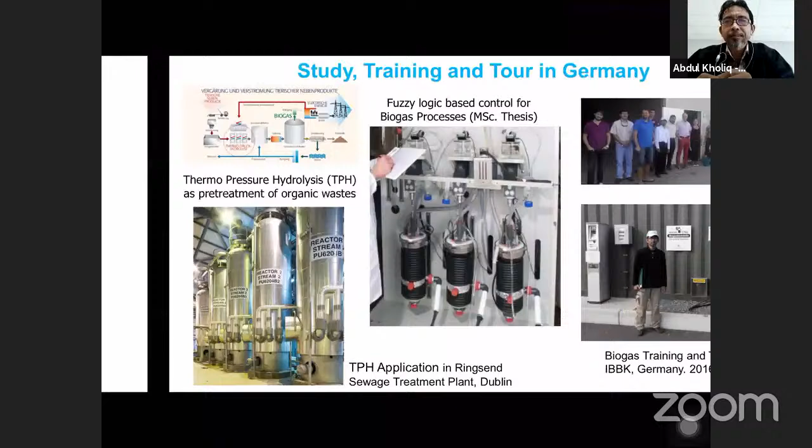That was my diploma thesis and master thesis about pretreatment of organic waste via thermopressure hydrolysis. For my master thesis, I did development of a fuzzy logic based control for anaerobic process. And in 2016, I visited Germany again for training and tour, a biogas tour by IBBK in Southwest Germany.

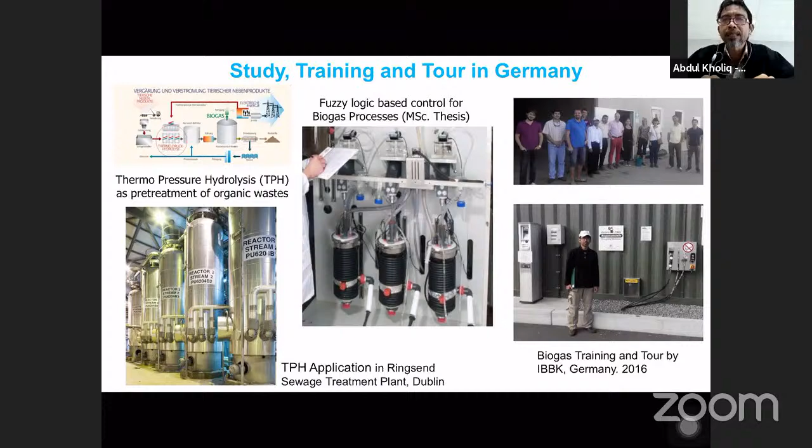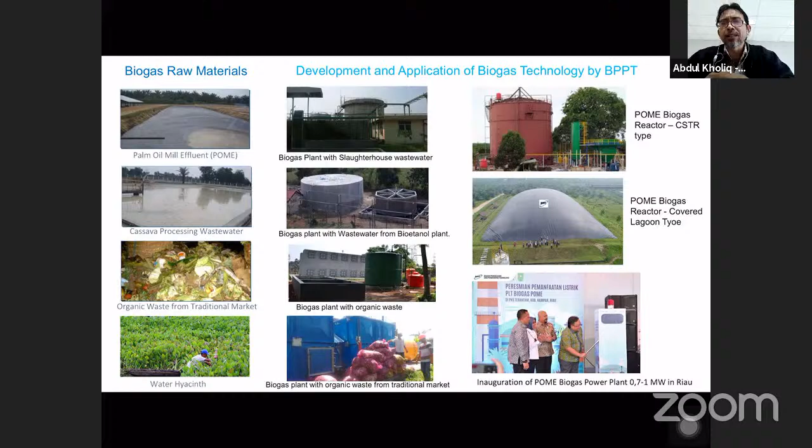That is our activity in Asia Pacific Biogas Alliance, mainly from Malaysia, some from Thailand, some from Philippines, and also from China and other countries in the Asia Pacific region. We have Asia Pacific Gas Forum and other activities we are doing together.

That is just about Asosiasi Biogas Indonesia, ABGI, Indonesian Biogas Association. There's some activity. The goal of this association is to develop further the biogas technology to be implemented in Indonesia.

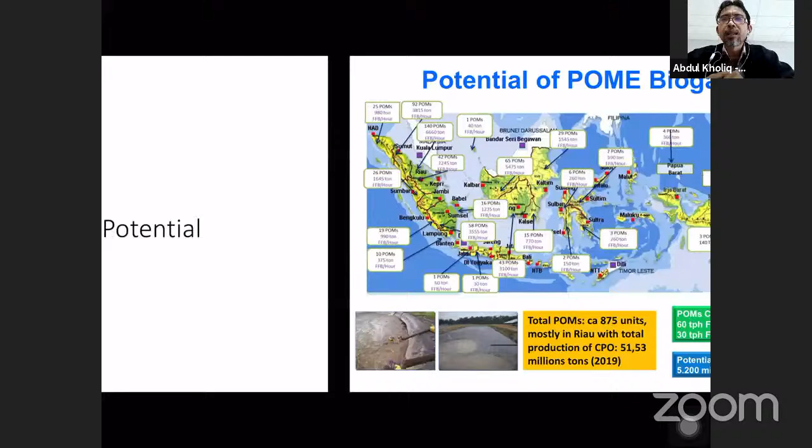I will introduce, mainly for European participants, the potential biogas potential in Indonesia. The biggest feedstock is palm oil mill effluent. We have in Indonesia about 875 palm oil mills, and our assumption is that only about 70 palm biogas plants are based on this POME. That means there's still so much potential application of biogas technology in Indonesia.

We do not have just POME, but we have also other wastewater from other agro-industrial processing.

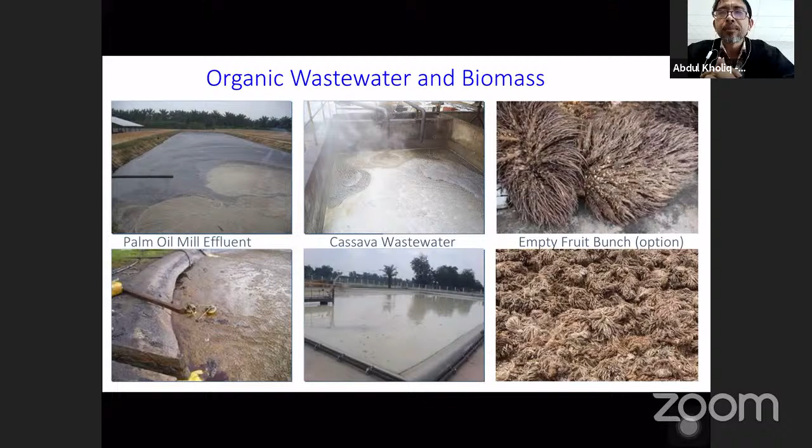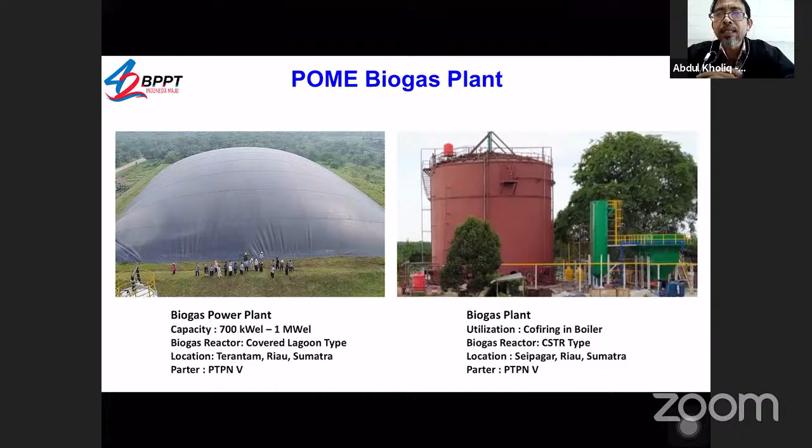Some examples of development I mentioned before, that is our plan. This is a capacity of almost 1 megawatt electricity. We try to use it not only for electricity production, but also for other purposes, for example co-firing for boiler, steam production, and so on.

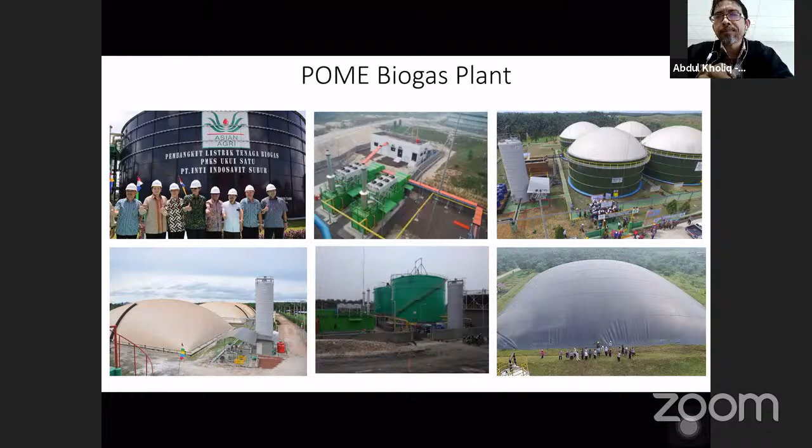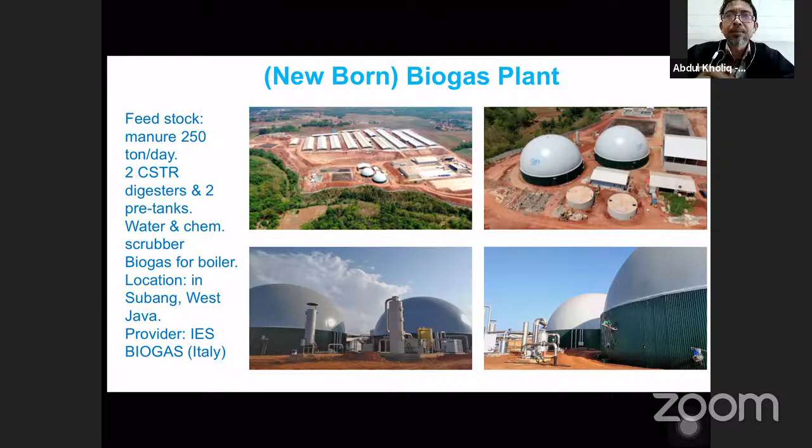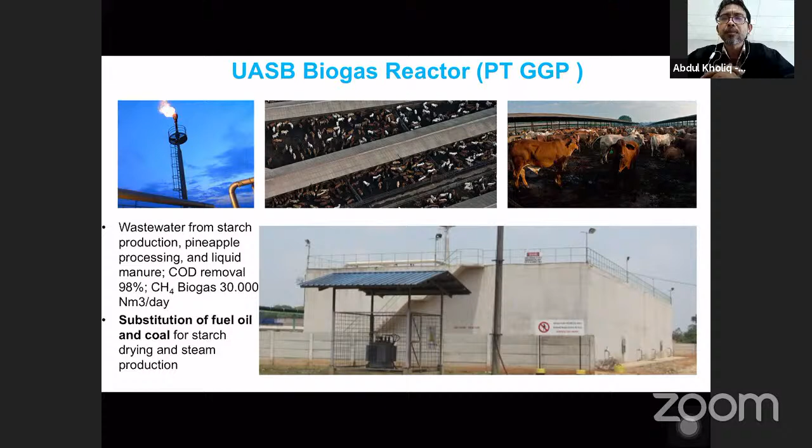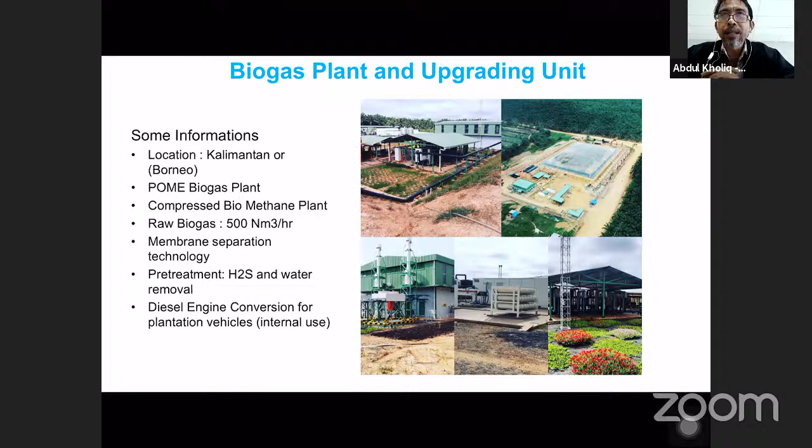This is our, not my, but an Indonesian project in biogas upgrading. I think that is the first one - in Germany there are already many hundreds of such upgrading units. This one is in Kalimantan, or Borneo. The processing capacity is raw biogas 500 cubic meters per hour. They use membrane separation technology, and also pretreatment to separate other gases like H2S and water. They use the biomethane for internal use for their plantation vehicles.

This is also just one example of our research and development - biogas from organic waste, from lab scale to a pilot scale in the field. This is in Lombok, near Bali. If you visit Bali, you can visit Lombok, and you can visit this plant.

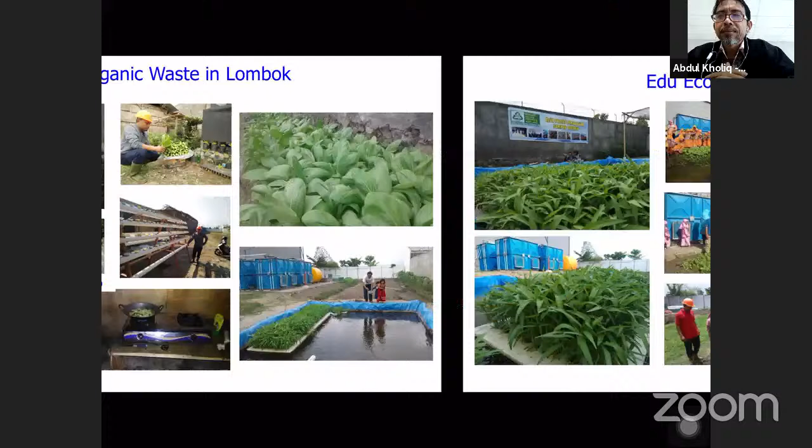We can use the digestate, or the effluent of the biogas reactor, as fertilizer or for land application. We can cultivate many useful vegetables and so on. And we can also use it for an eco-tourism destination.

I would like to give future development needs or applications - the potential, as I mentioned before, not only POME, but also other solid waste material and so on. We need pretreatment technology, and we can also use biogas not only for electricity production, but also upgrade it for fuel and so on.

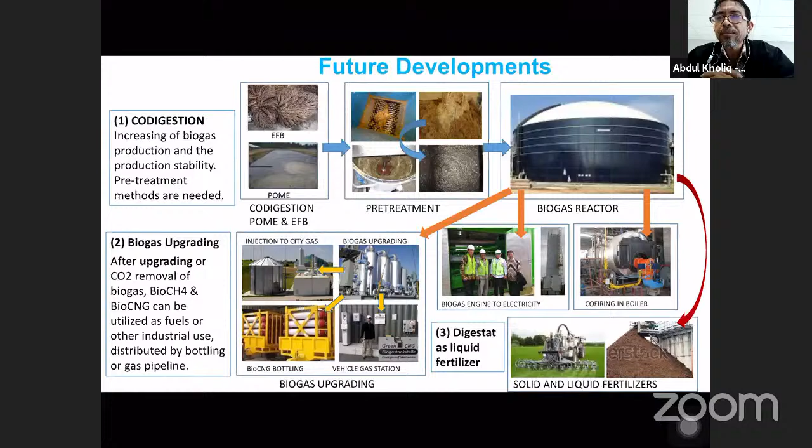Just some examples of pretreatment: mechanical pretreatment, sand removal, fiber removal, and also thermal pressure hydrolysis - possibly what I did some 20 years ago - and also other chemical, enzymatic methods, or we can combine with mushroom cultivation and so on.

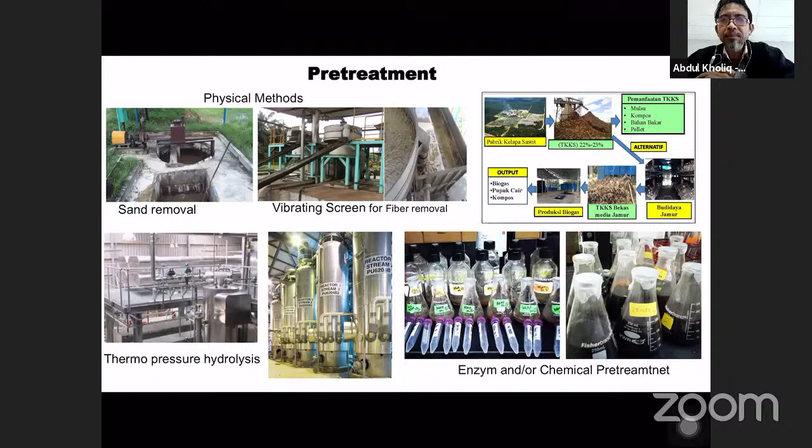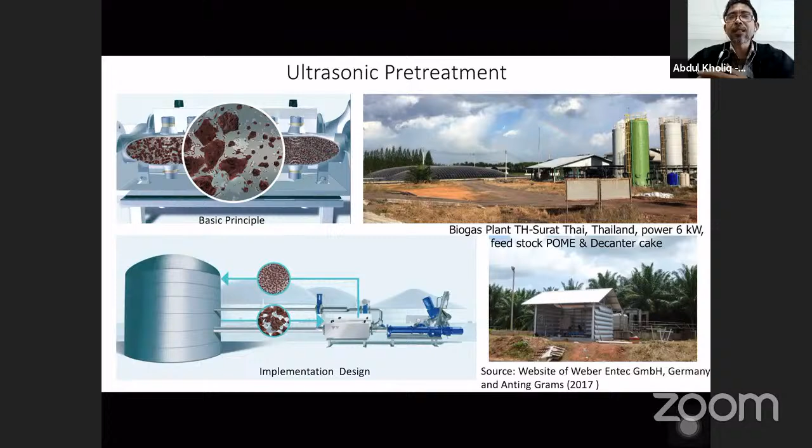That is another technology I know from during my study. Many groups in Germany developed ultrasonic technology, mainly for disruption of activated sludge from municipal wastewater from a city. A city has a big wastewater treatment plant, and they produce sludge that contains microbes. This microbial organic matter can be treated or converted to biogas, and we need ultrasonic to destroy the cell wall of the bacteria. Optionally, we can also use it for POME to get better fluid dynamic characteristics of the POME.

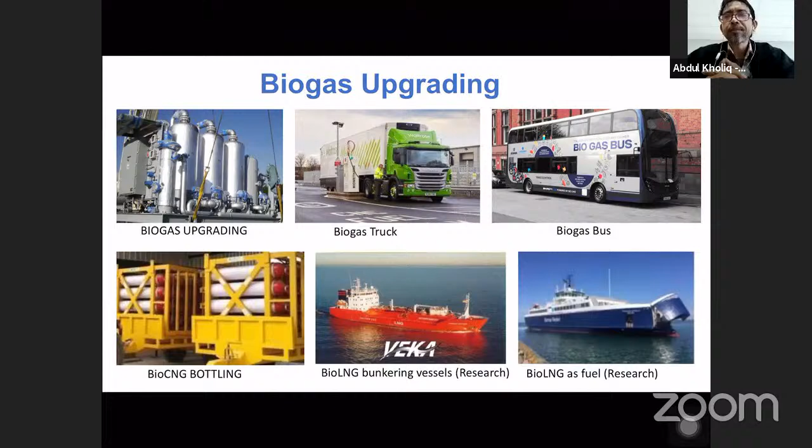I visited 4 years ago the gas fuel station for gas vehicles developed by a biogas farmer close to Stuttgart, supported by the government of Baden-Württemberg.

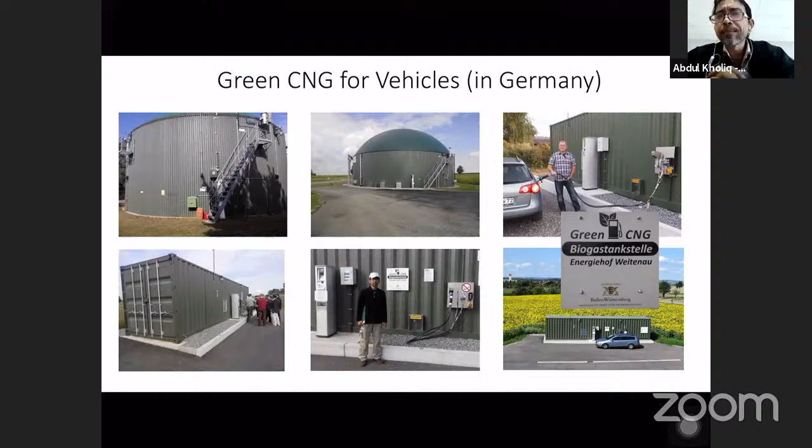I also visited this plant. We would like to implement this technology in Indonesia. I personally have the motivation, but I cannot do this alone; we have to do it together with other stakeholders.

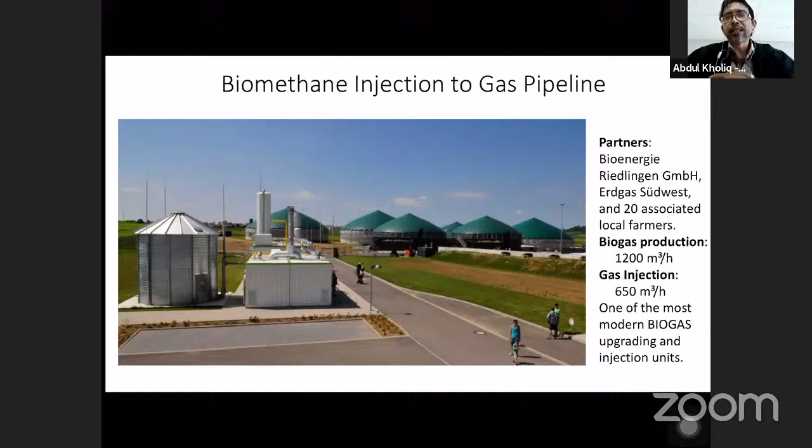This is just an example of utilizing biogas in the form of biomethane injected into the gas pipeline as city gas.

In Jakarta and around Jakarta, there are already so many vehicles using natural gas as fuel. Theoretically, if we have biomethane or bio-CNG, we can replace this natural gas. The infrastructure is already there, and if we can provide bio-CNG, we can also use it for vehicles.

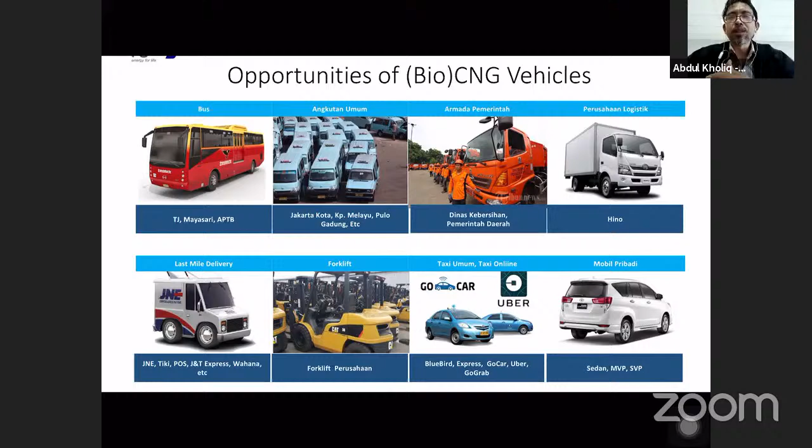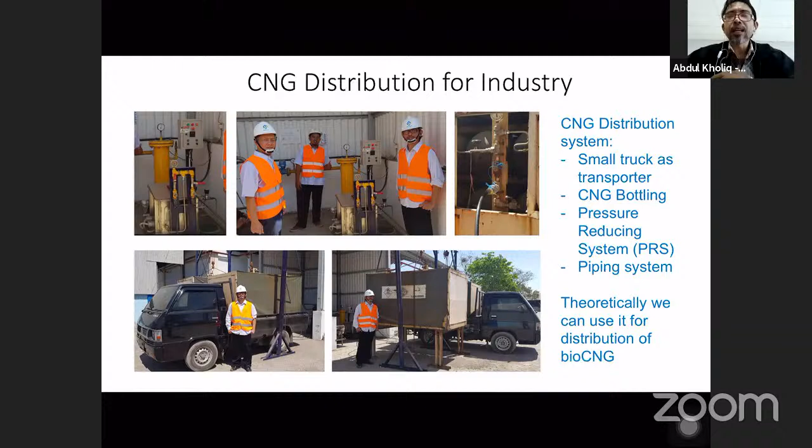Or we can sell it like CNG, using the distribution system already practiced for industry.

Or we can use the household gas pipeline for households. This is mainly done by the Ministry for Energy and Mineral Resources.

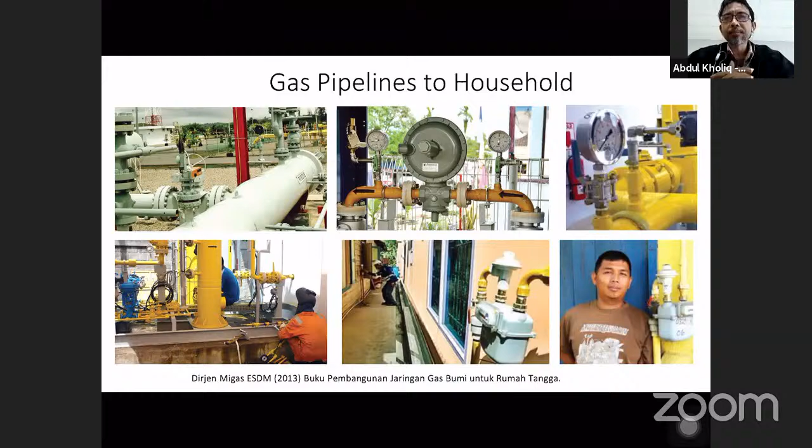Just two examples of research and development in this direction. There is a group from ITB in Bandung that developed water scrubber technology to upgrade biogas, to remove CO2 and so on.

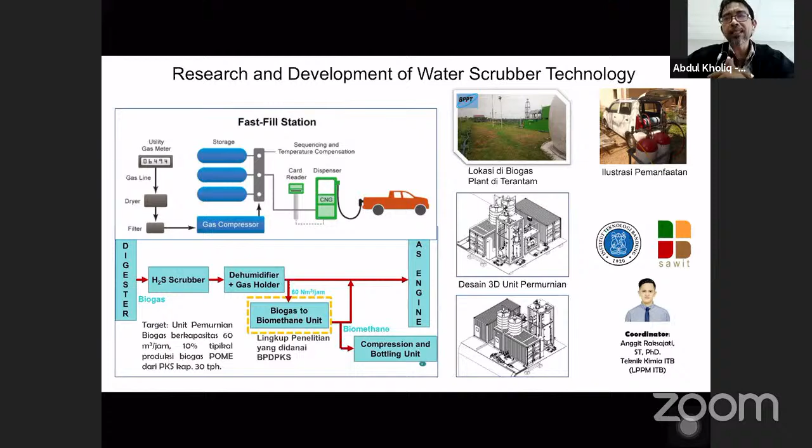The next one is the group from Gadjah Mada University in Yogyakarta. They developed nanoporous carbon, which we can use as an adsorbent, for example in pressure swing adsorption, PSA.

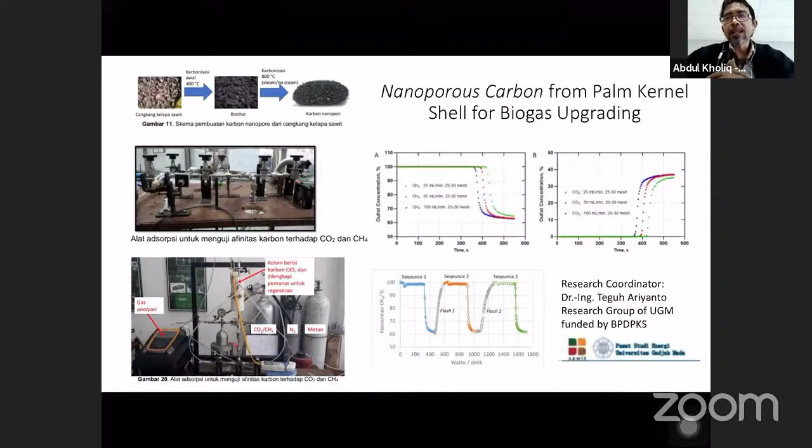I think this is the last remark: there is also big potential for technology providers in Europe, please come to Indonesia. But for example, special for German technology, we know German people have the principle of high quality technology product, but on another side the price is a little bit higher compared to others.

So I would like to give a remark, especially to Frank Hofmann, that it would be better if we can develop technology products, in this case biogas technology, with high quality but lower cost. I think, for example, German companies could come to Indonesia with manufacturing or a fabrication workshop here in Indonesia, so we can try to lower the price. Yes, this is my remark. We can discuss later if needed. Thank you.

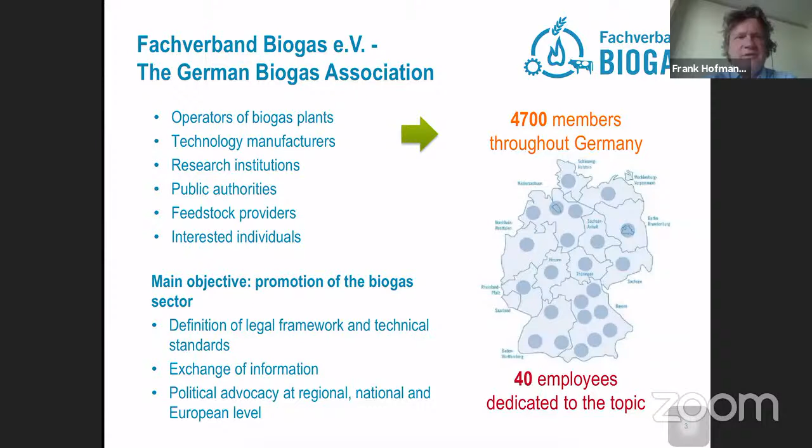We also have companies and technology manufacturers as members. From the membership fees, we pay salaries for 40 employees working for the German Biogas Association. The main objectives are working on legal frameworks, political advocacy, developing technical standards, and exchange of information. That's the part I'm doing now, and in short, those are the main points about the German Biogas Association. Next slide, please.

Some people in the chat already mentioned what is the main motivation—why should someone think about biogas? I'm working often in international contexts, from Africa to the Caribbean, and these are the main answers I usually get on these questions.

One is decentralized energy solutions. With biogas we could produce electricity, heat, or transportation fuel—I'll come to those utilization paths in a few minutes. In some regions this even means avoiding blackouts, which is very important, probably more in Africa. I don't know about very remote islands in Indonesia and how stable the grid is there, but avoiding blackouts is very often heard in Africa, along with reducing high costs from importing fossil fuels.

In Indonesia, I think many fuels or forms of energy are subsidized. Landing oil at the harbor, for example, is cheap, but transporting oil for vehicles hundreds of kilometers inland is costly. Producing energy on location might be a chance as well, as motivation for biogas projects.

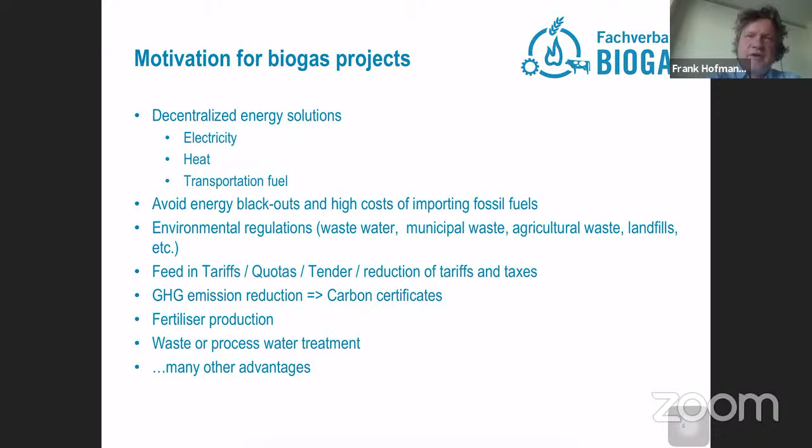I won't talk in this presentation about home digester systems or landfill gas utilization, because the DiBiCoo project is focusing on industrial biogas plants. Having said that, let's move to the next slide.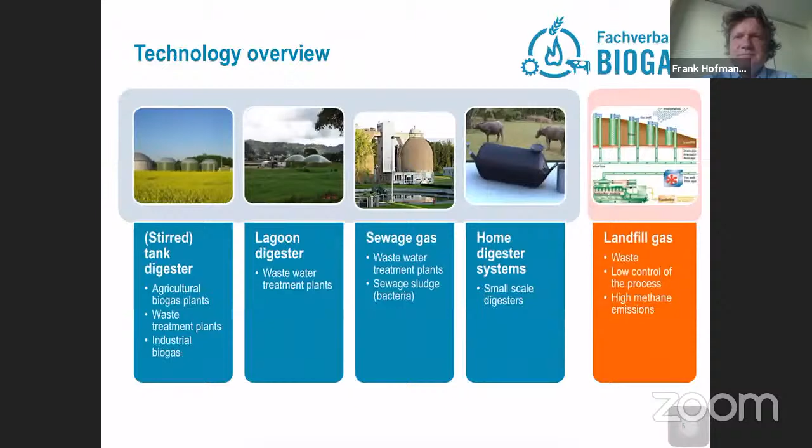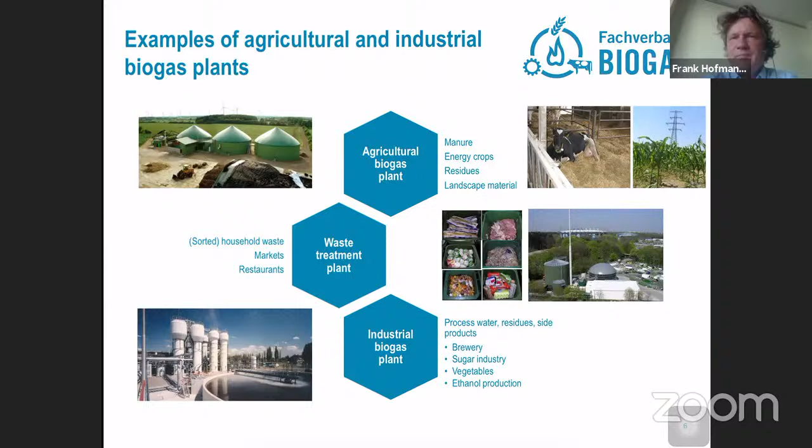The feedstock could be organic municipal waste or bio-waste at household level. Industrial and commercial waste is a very huge and promising potential in Indonesia, such as the palm oil mill industry, but any kind of food processing industry might be a good chance to start a biogas plant.

When thinking about agricultural animal byproducts, manure is a typical input material for biogas plants, as are vegetable byproducts. For example, during harvest not all fruits can be sold—some are not the best quality, and that could be used for biogas plants, or even the leaves of the fruits, sometimes half of the mass, which cannot be sold on the market, could be used as a byproduct.

Important for this slide is the type of technologies. There are very different kinds of technologies developed and available on the market. In this slide, from the left-hand side, if the dry matter content is 0, that's pure water, 100%. On the right-hand side, we see 50% organic dry matter, meaning half the material is water and half is organic material. Depending on the amount of water or dry matter content, there are different technologies adapted to the feedstock—the feedstock and the technology should go hand in hand.

On the left-hand side we can start with lagoon biogas plants, wet digestion. Coming to the middle, we have dry continuous digestion, or from 30% upwards, dry batch digestion, or even composting. I will go into these technologies in a few minutes, but with this slide I wanted to show the overview that the best technology mainly depends on the quality of the feedstock.

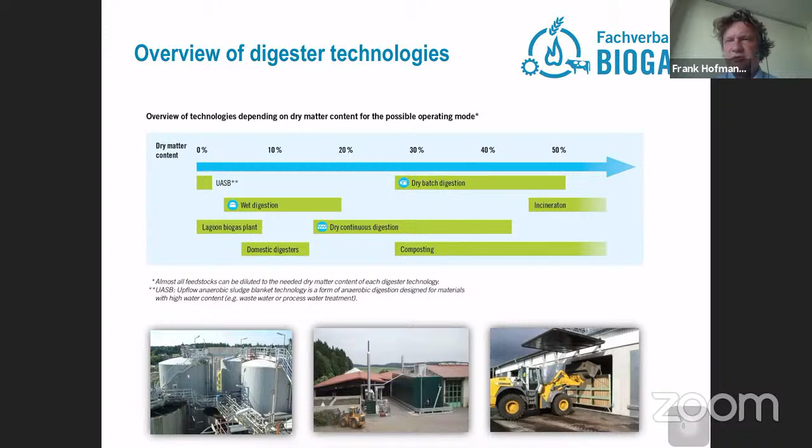Most often used are continuously stirred tank reactors. In Indonesia, it's lagoons—I will come to that in a minute. But in Europe, the typical technology is continuously stirred tank reactors.

Here you see some components. Usually it's a tank, several hundred cubic meters big, mainly made of concrete, sometimes steel, with an agitator and mixer inside. Under European conditions, it's good to have a heating system since it's very cold in winter. In Indonesia I will come to that separately. If you need a heating system, heating up the material speeds up the process. The bacteria inside the digesters feel best at a temperature of about 37 to 40 degrees, and that's why many biogas plants are heated.

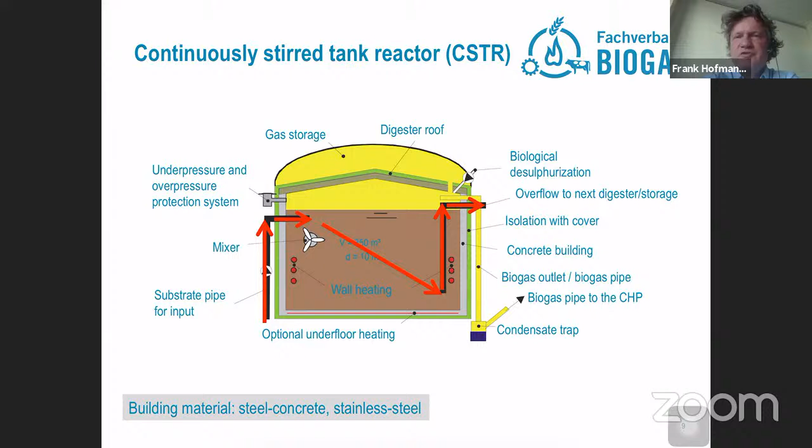Very often on the rooftop of such a digester is a gas storage. The biogas itself is produced in the liquid—the tank is filled with liquid, and the brown part of the graph is liquid. Biogas is produced there, goes up to the top, and there's a gas storage, often on the rooftop, but it could be beside it as well.

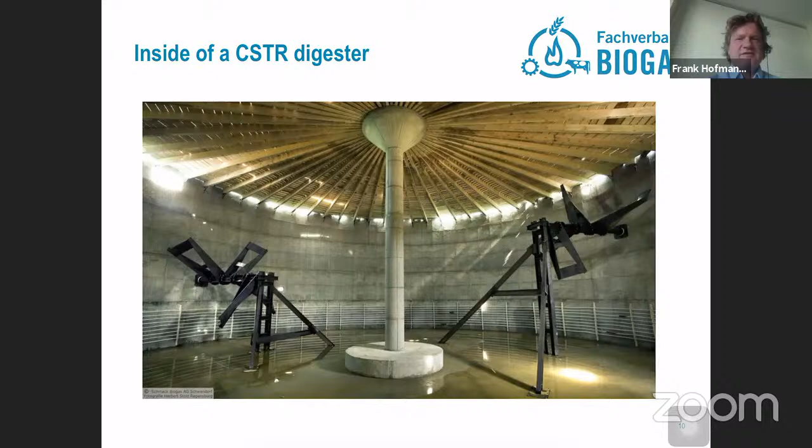That's a typical look into the reality of how it looks. The digester is made of concrete; on the bottom floor you see the pipes for heating, and a very robust agitation system. The mixer is very important because it has a lot of mechanical stress, so it must be very well designed. On the rooftop we see a wooden construction where some bacteria could settle to reduce H2S, and above that will be the gas storage.

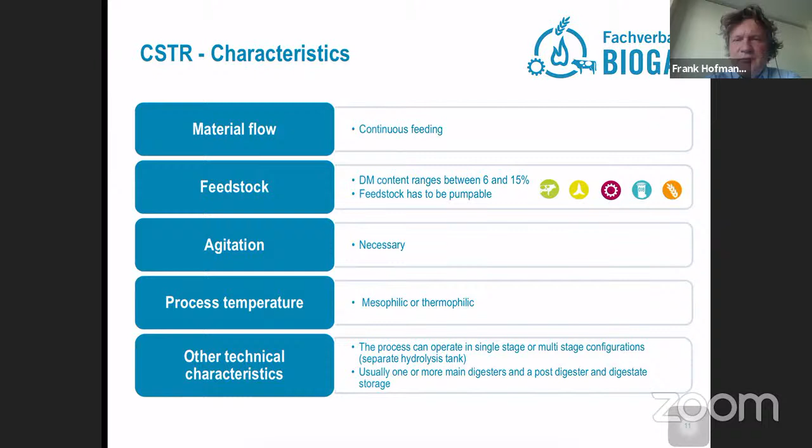I already mentioned most of the characteristics. Usually with continuously stirred tank reactors, we have continuous or near quasi-continuous feeding, maybe 6 or 12 feedings per day. Feedstock can be nearly any quality we can think of. The typical dry matter content ranges between 6 and 15%, and the feedstock should be pumpable. Agitation is usually necessary to avoid sinking layers and swimming layers, and to bring the feedstock together with the bacteria. Temperature can be about 37-40 degrees mesophilic, but it can also be operated thermophilic—that's the main important point.

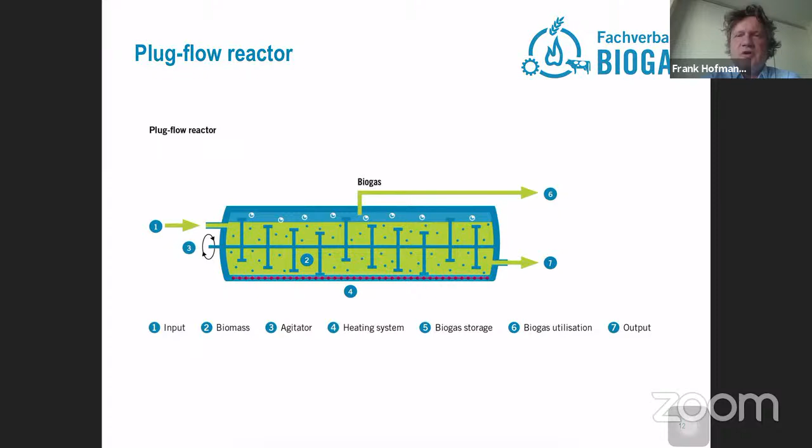Characteristics: the dry matter content is usually a little bit higher. Here we see the typical values are 15 to 45% dry matter. We have continuous feeding.

The agitator is very important because such a system needs really robust agitation to push the material through the digester. Often the temperature is thermophilic, but mesophilic is possible as well. This kind of plug flow digester can be constructed horizontally or vertically. Usually there's a limit to the reactor volume, about 1,000 to 2,000 cubic meters. The completely stirred tank reactor, which we had before, can sometimes be constructed even bigger. The plug flow digester size is usually a little bit limited by mechanical stress.

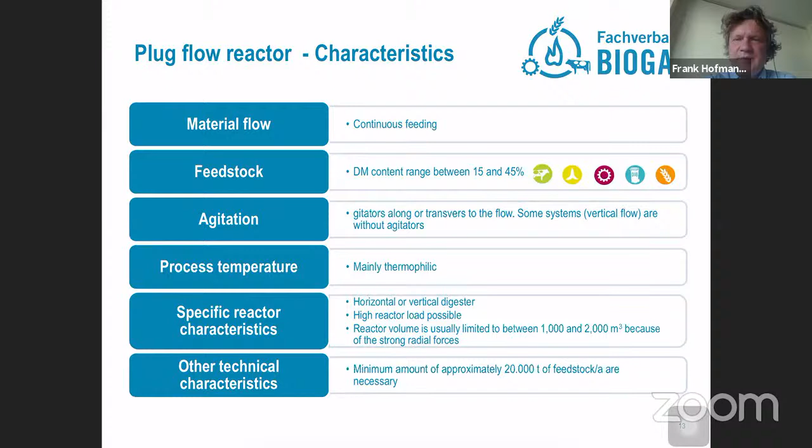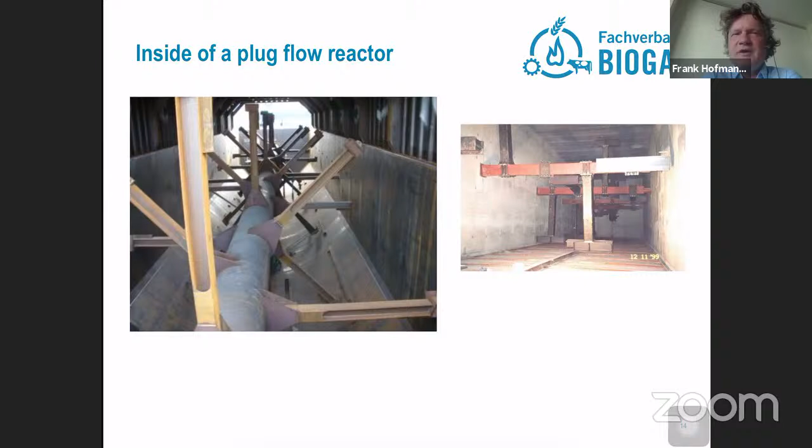Having said that, let's move on. That's a picture from inside, so you get an impression of the robustness and stability of such a stirring system. It really experiences huge mechanical stress, and it should be built so that such a stirring system will hold reliably for at least 8 to 10 years. Then usually it is exchanged, but that's a key picture from the side of a plug flow digester.

We come to a very different kind of technology, the garage system or dry batch reactors. It is constructed like a garage - you see it here in the middle of this picture. The door is opened and the material is brought into such a garage system by a wheel loader, for example. After filling it up, the door of the garage is closed, and within this garage system, bacteria and feedstock are brought together to create biogas and digest the feedstock.

What's important is that during digestion, water will flow out because the cells are broken up. The water is collected in a drainage system at the bottom, pumped into a second digester called the percolation system. From this percolation system, the water is spread into the garage as well, to bring water and bacteria to the feedstock. This percolation is an important point. About half of the gas is produced in the garage itself, and about half is produced in the percolation tank.

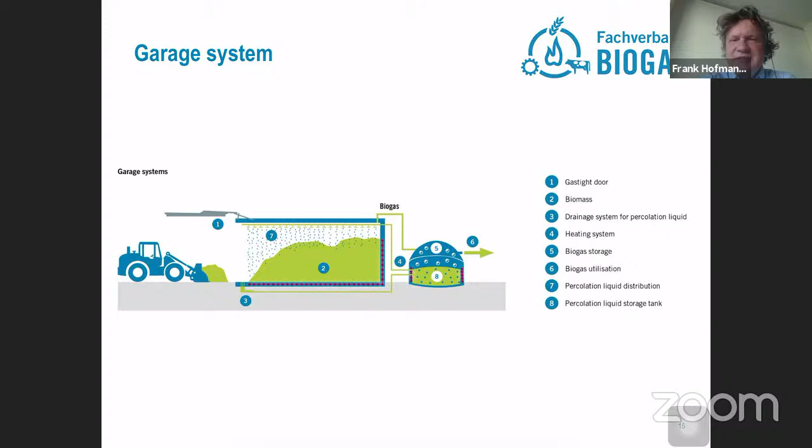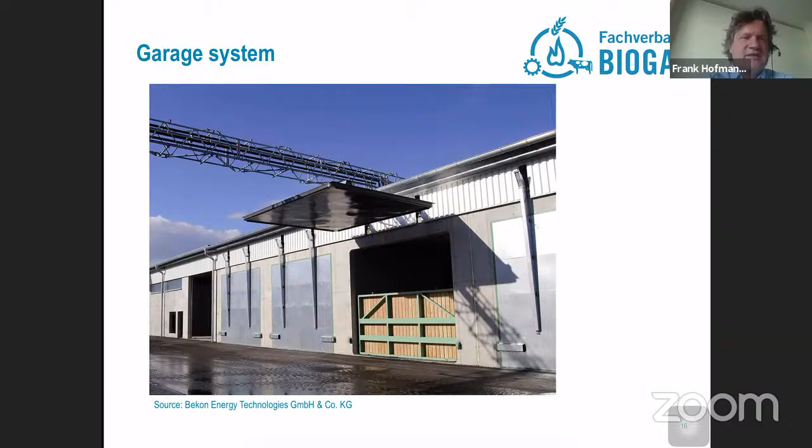That's how it looks in reality. We have huge garage systems, sometimes hundreds of cubic meters - doors open, filled in, then closed after a while. The typical retention time is about one month, about 4 weeks with the door closed. After that time, it can be opened again once most of the material is digested.

Here are the characteristics: we have discontinuous feeding, about every 4 weeks. The feedstock can be much drier, 30% or even above, sometimes stackable rather than pumpable. We have no agitation, which is good from a maintenance perspective - no agitators or moving parts in the reactor makes it quite robust. Typical process temperature is mesophilic.

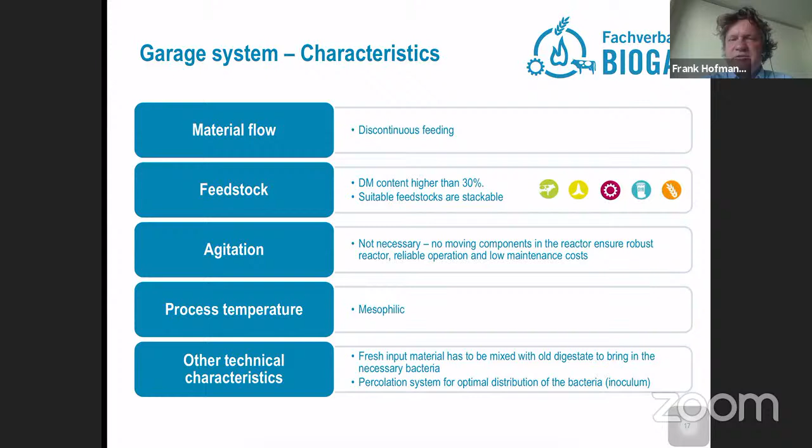Another characteristic: new, fresh incoming material is usually mixed with already digested material. So if the garage is emptied and refilled, usually about a third or a fourth of the feedstock remains in the garage and is mixed with fresh material again, to bring bacteria and feedstock together. The percolation system, as I mentioned, is an important point.

We should have membrane or plastic material on the ground to avoid leakages into the ground, and of course we have the cover, a membrane cover for gas storage. This is somehow a very simple way to create a relatively cheap, not too expensive biogas plant.

Mr. Abdul already mentioned that European technology is usually high priced. Sometimes it is, yes, but it's reliable - biogas plants usually work reliably for 20 years. These kinds of lagoons are less expensive solutions, but we will come to some advantages and disadvantages in a few minutes.

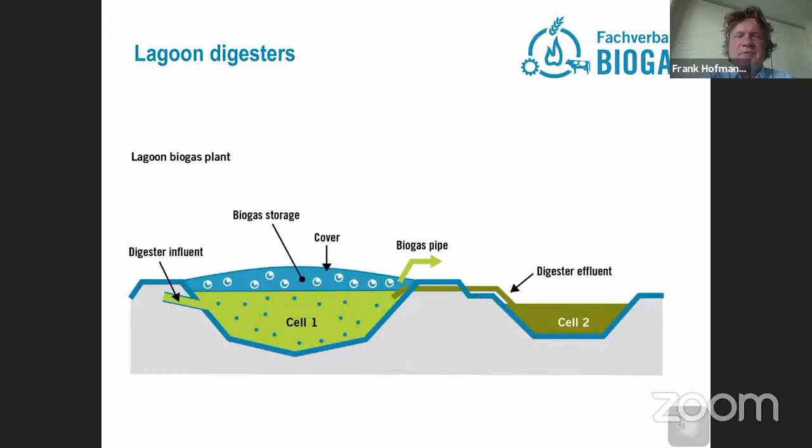Oh, now I see that my battery is low. I'm back in a minute. My battery is very low. Sorry, I'm back, I saw just the warning that the battery was low. Okay, let's continue, the next slide please.

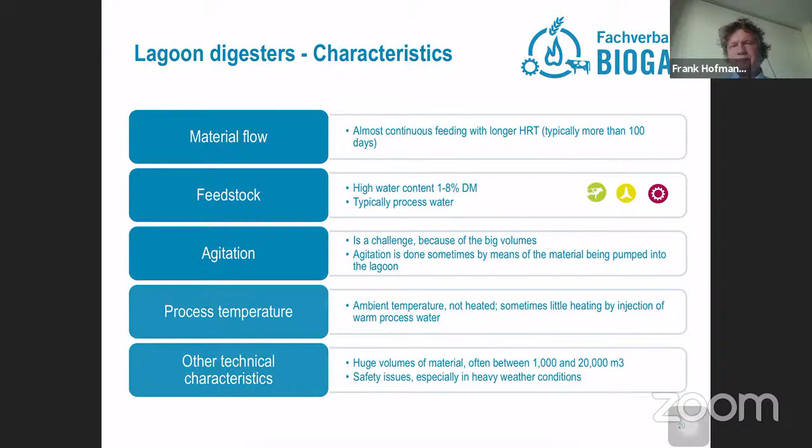Safety issues - I don't know exactly in Indonesia what's the status about that, but I heard from Thailand that they had huge problems with the safety of lagoon digesters, huge surfaces of membranes. So if there are heavy weather, rainy season or storms, some membranes were blown away or even huge accidents with that. So the safety issue is an important point considering lagoon digesters. It's a good technology, but we really want to stress that it's important that those technologies are constructed so that the operation can be done in a safe way.

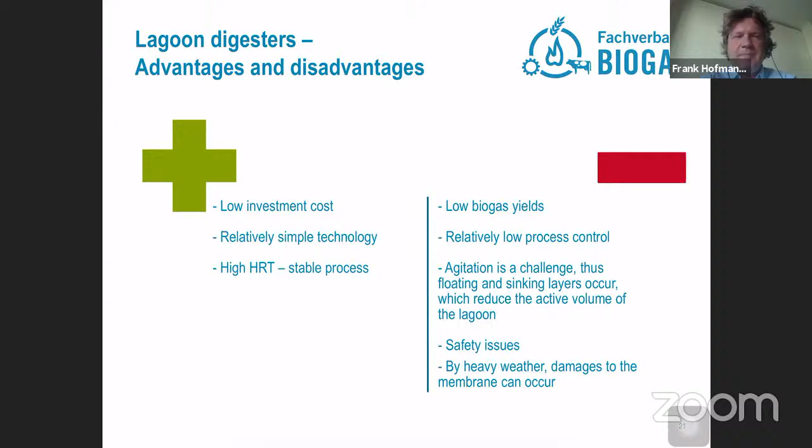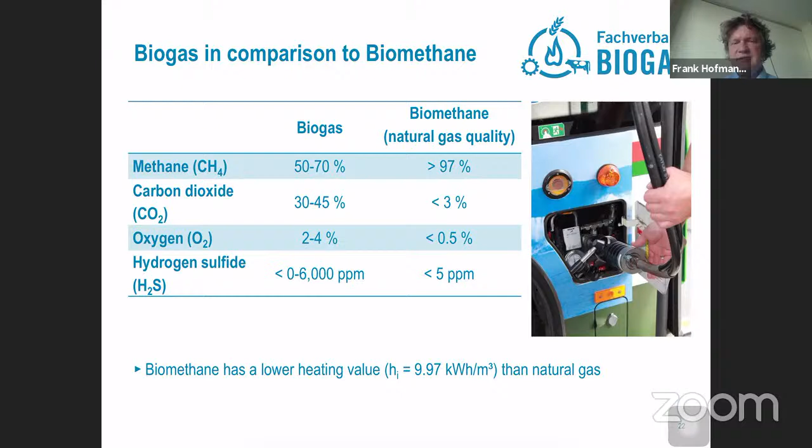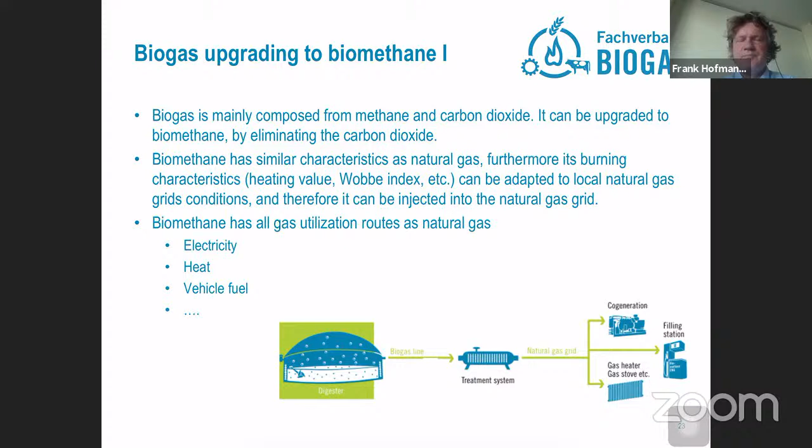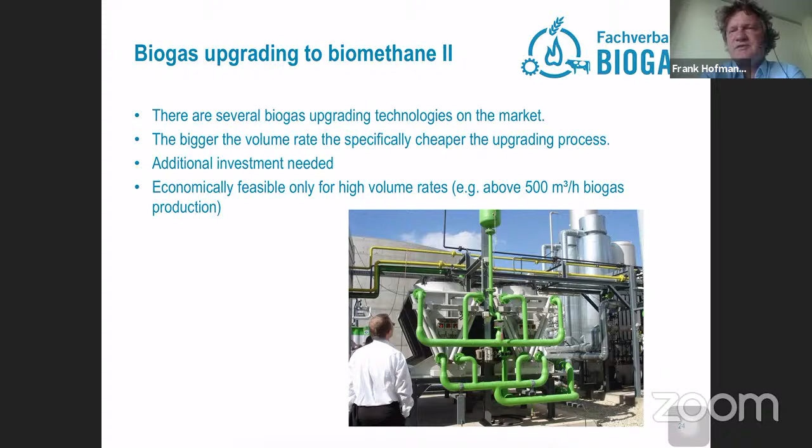But there's additional investment needed for the equipment, which is usually economically feasible only for high volume rates. The typical size of a biogas upgrading plant is about 500 cubic meters per hour. In Indonesia, biogas production rates should be even higher, possible for big lagoon plants. But not all biogas plants will be equipped with a biogas upgrading system, only the bigger ones.

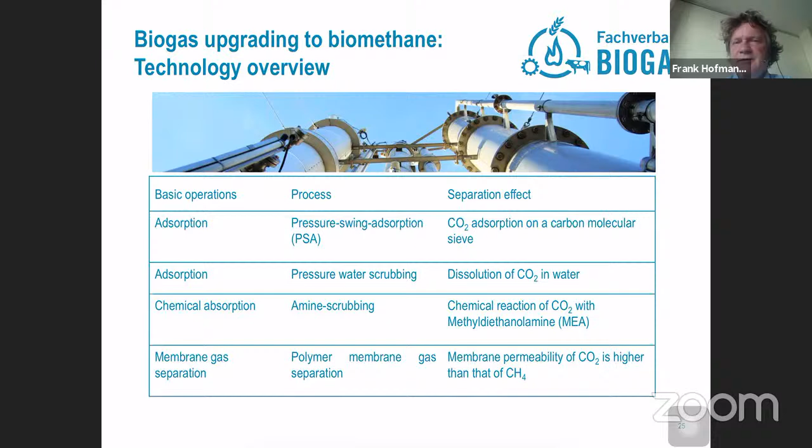There are several technologies on the market. Due to limited time, I won't go into details, but here's an overview showing there are several technologies available, and the choice of the right technology depends mainly on gas quality and volume rate, and some other conditions on the location.

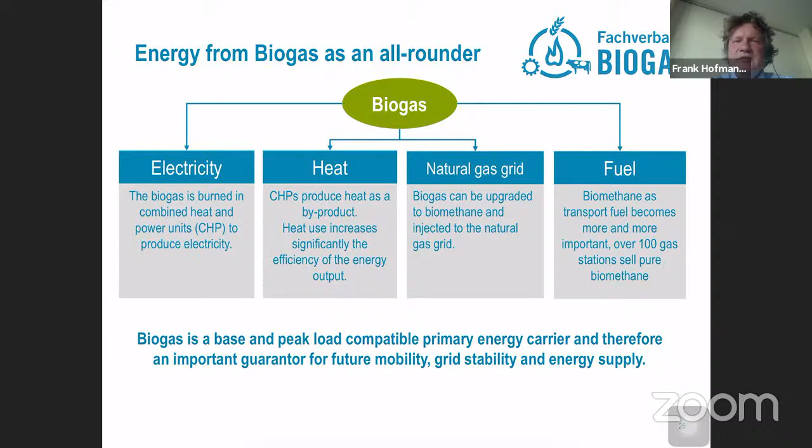I already mentioned how to use the gas: for electricity, heat, natural gas. At the end of this presentation, I'll come to a project example in the region, at least near Indonesia. I didn't have an example from Indonesia, but this is from the Philippines, and maybe some similarities between Indonesia and the Philippines can be seen here.

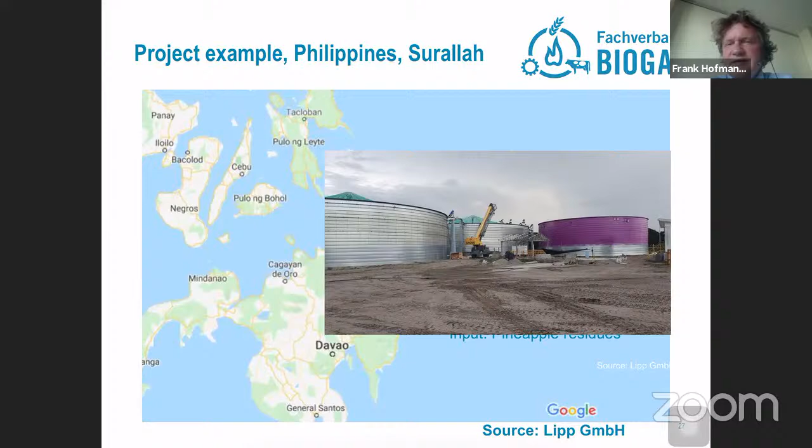This is a biogas plant created by the company Lipp in the Philippines. The interesting thing is that it's working with the residues of pineapples. There's a pineapple plantation, these are the residues, and those are used for the biogas plant.

Two-thirds of the gas is used in the boiler, 5,300 kilowatt thermic, and one-third of the gas is used to produce electricity and heat. The gas energy is used on location for the pineapple production or pineapple cannery.

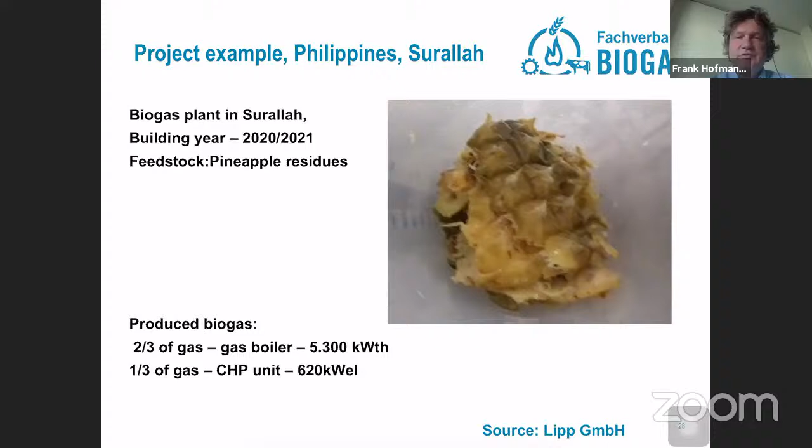There are several digesters: one pre-digester before the main process, two main digesters, and one post-digester. The pre-digester has a volume of 3,000 cubic meters.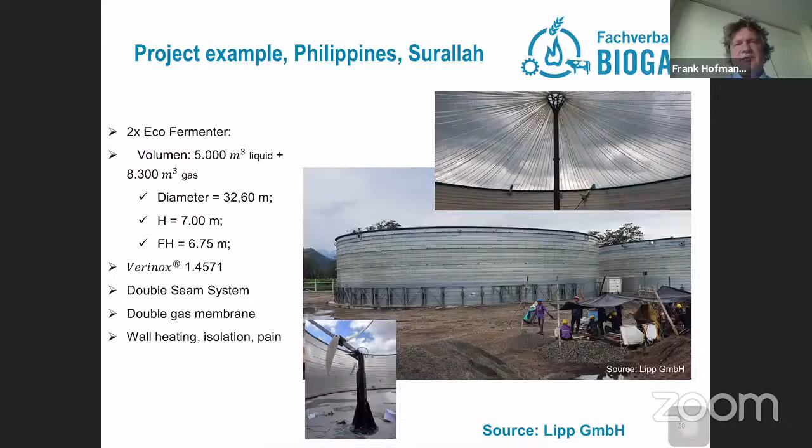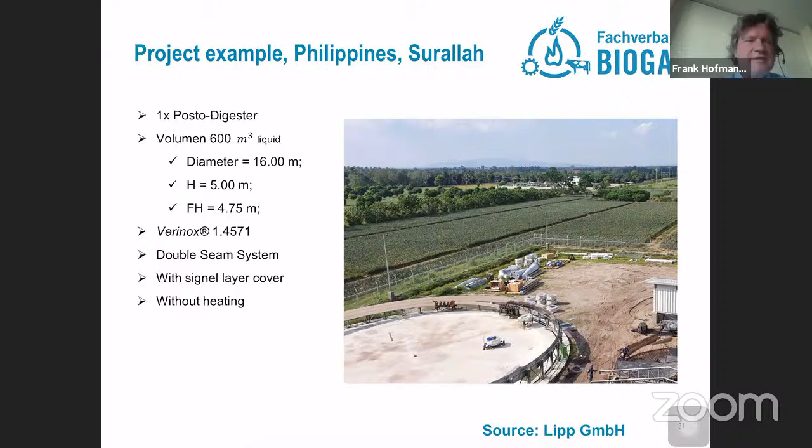And a post-digester, which has a volume of 600 cubic meters. That's mainly the end of this presentation. I'll make a very short summary now.

Biogas plant technology is nothing new, it's a well-established state-of-the-art technology. When we talk about this in developing countries, banks are sometimes skeptical, thinking it's new technology and questioning its reliability. But we have more than 80,000 biogas plants in operation in Europe, so it is reliable. We have decades of experience in Germany, 20 to 30 years.

There are several technologies on the market. The main value usually comes from energy or carbon certificates. The example from the Philippines was at least half financed by carbon certificates. Fertilizer is also a huge value, since the effluent of a biogas plant contains all the minerals.

Wastewater treatment might be an option for revenues. Some biogas plants treating waste are getting a gate fee for waste treatment, and they are mainly financed by this gate fee. Biogas can be used for electricity, heat, and transportation.

And that's my presentation. Thank you very much for the attention.